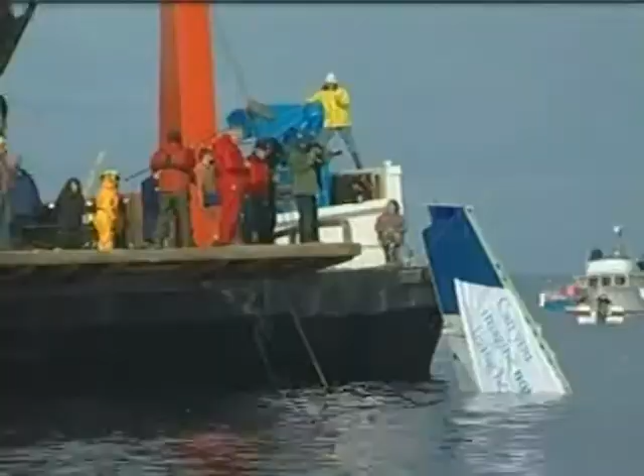We'll show you why this Boeing 737 slipped beneath the waves off BC over the weekend, and why that's a good thing.

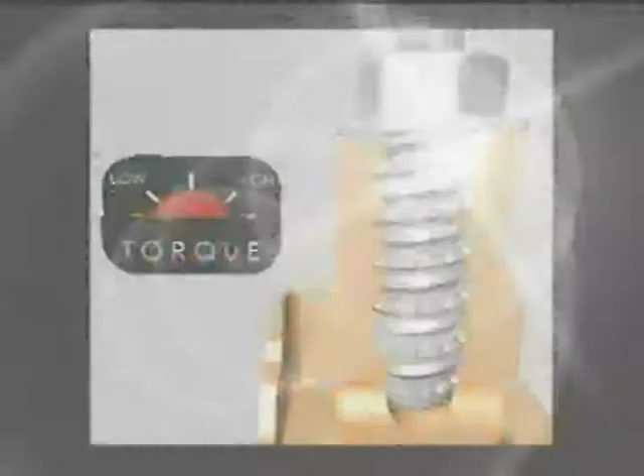Plus, all screwed up and proud of it. We'll introduce you to a guy who invents new kinds of screws to keep this world a little bit more secure.

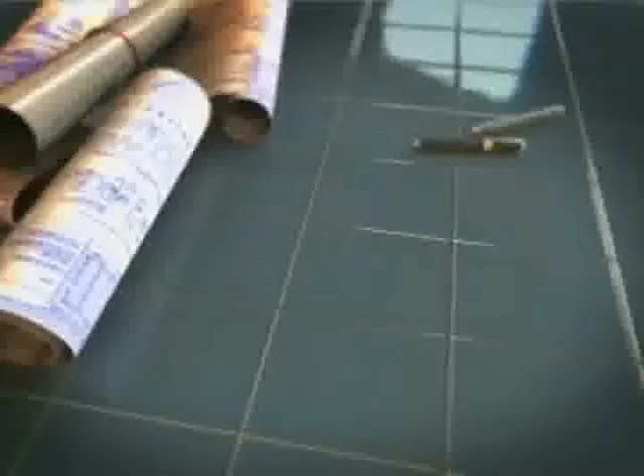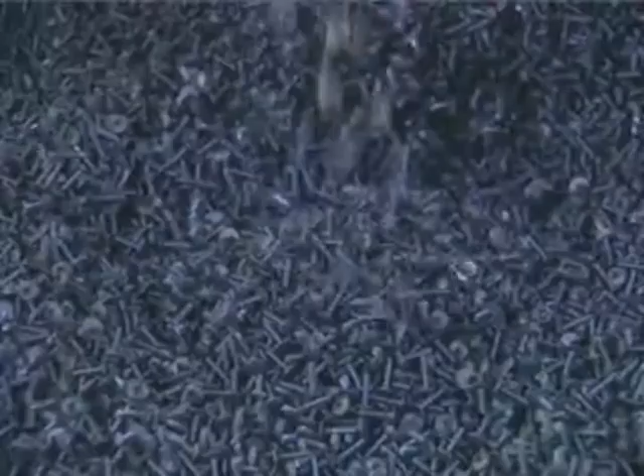Meet Kenneth LeVay, or as his friends call him, the Screw King. The screw is the best invention in the world because within 10 feet of anybody, you have tens or hundreds of screws.

From our homes to our cars to desks, the humble screw does hold a lot of our world together.

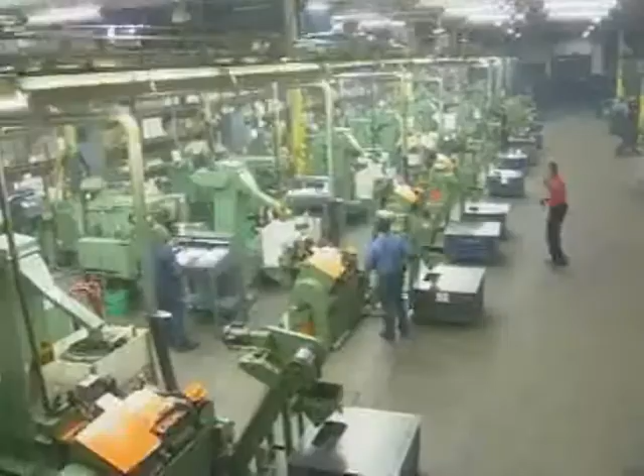Illinois Tool Works, ITW, is one of the world's largest manufacturers of screws. They pump out more than 6 billion every year. If we assume an average length of 1 inch and laid them end to end, they would go around the equator of the Earth 4 times.

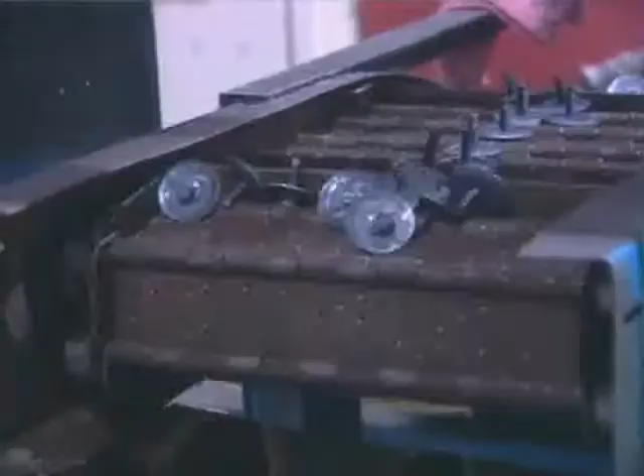Remarkably, screw design has changed little since Archimedes invented it more than 2,000 years ago. As an engineer with ITW, Ken knew there had to be a better way.

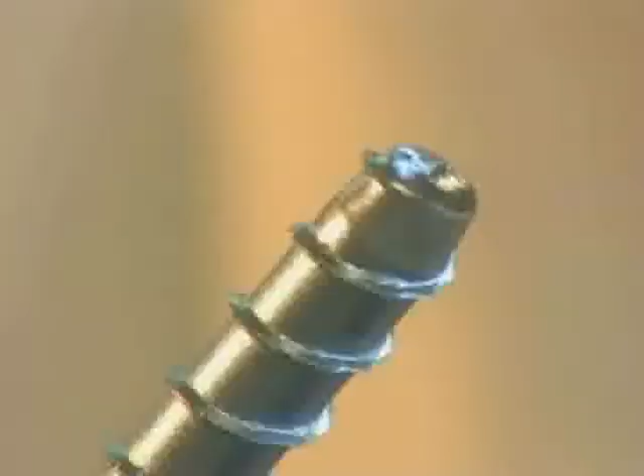The limitations to a fastener have historically been that you have to have this helix, or ramp, that wraps around the screw. Ken thought by changing the thread pattern on a screw, it could better hold and drill into different materials. With 18 patents and another 20 pending, he really is an outside-the-box thinker.

I think I've always been an inventor since I've been a little kid playing with Lego.

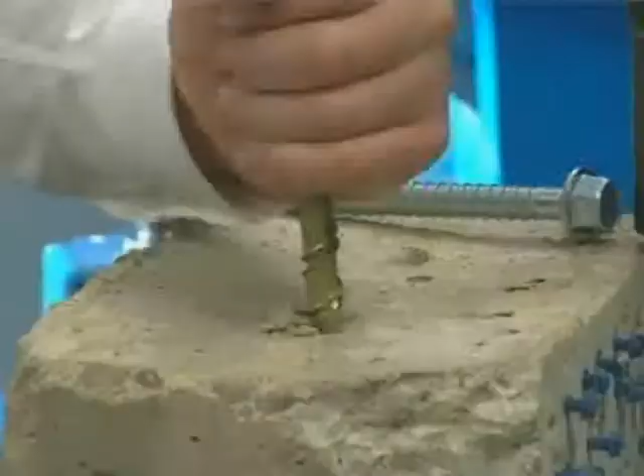Ken first wanted to tackle the difficulty of drilling a screw into concrete. If you take a chisel and you could possibly put that onto a screw—that was the thought. They thought Ken was out of his mind, that you couldn't really do things like that.

Everybody feels like it might be a dumb idea until you prove it, so it takes a lot of effort to prove your idea to people, and you have to have a lot of self-confidence in what your idea is. Because if you don't believe in yourself, then nobody else will also.

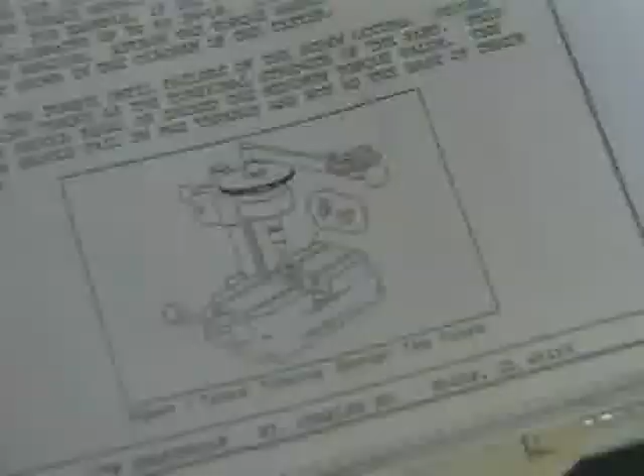By taking the 50-year-old screw geometry and matching it with the latest computer technology, Ken was able to see his ideas in 3D. He calls it Wercs.

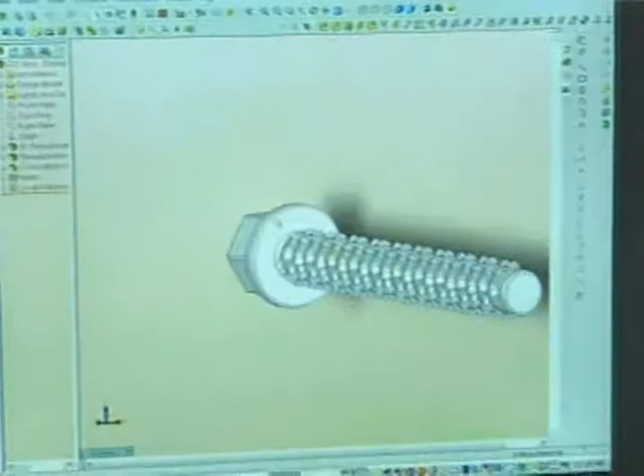That's screw spelled backwards. That's a chisel feature right there on the chisel, and if you put that into a round shape, there's your chisel feature right here. We create it with this math. Your chisel feature is right here.

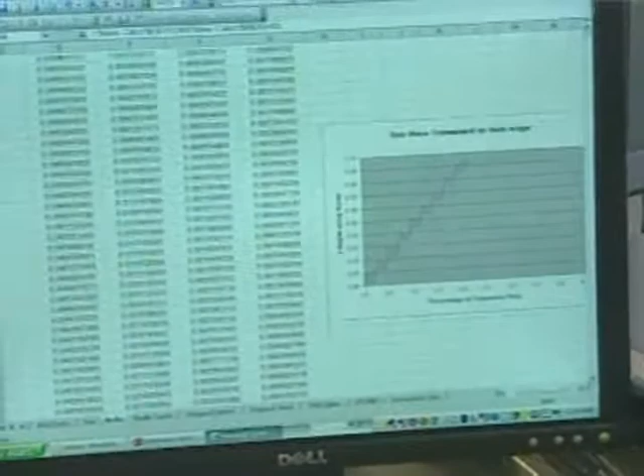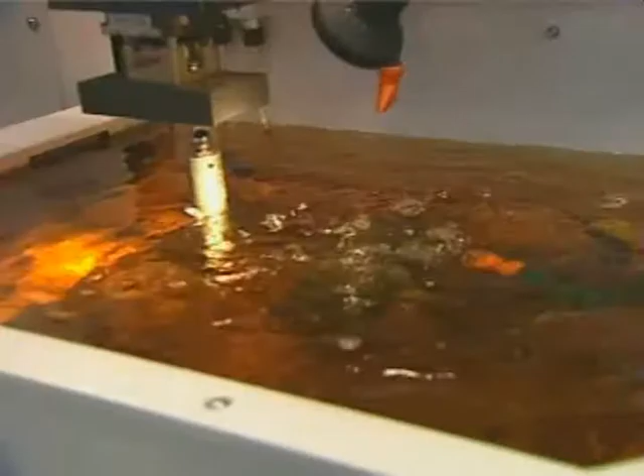Putting math to metal required electric discharge machining, EDM. It submerges a metal block into oil and zaps a pattern onto the surface with a 20,000-degree electric arc. The smoke you're seeing is actually vaporized metal. We then have all of the geometry necessary in this steel tool to make a screw.

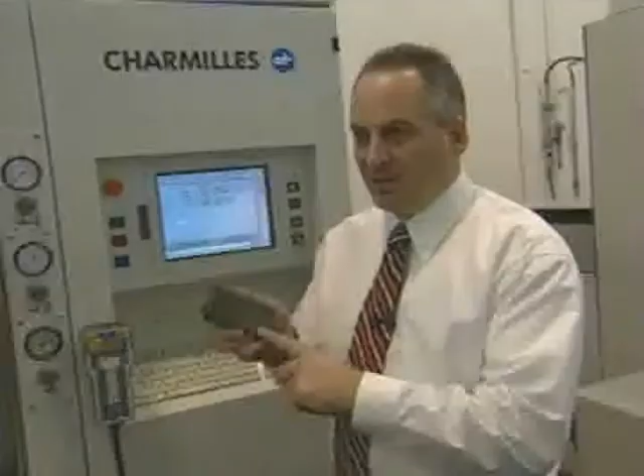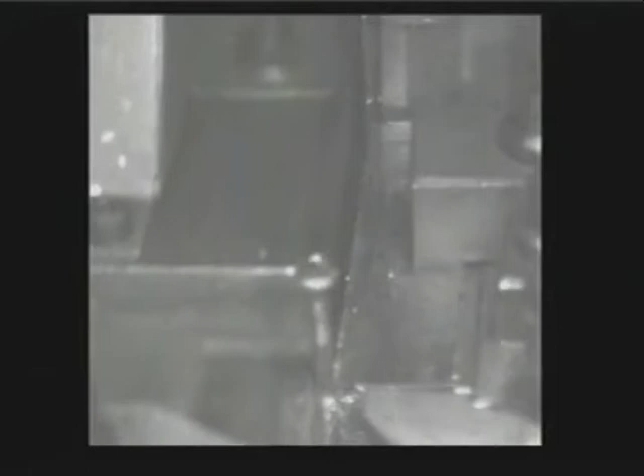The way we make a screw is by taking a round rod with no shape and placing it at the start in between these two pieces of steel. With a lot of pressure, you push them across, and the screw rolls over the surface, creating a screw.

And it worked. In fact, tests have shown that this new screw, dubbed the Tapcon, is 40% easier to drill than traditional screws—a pleasure to drive in, compared to... well, what would you rather do all day long?

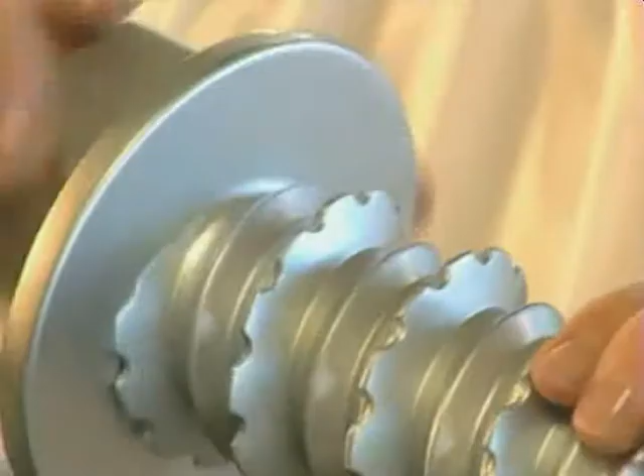Once he'd mastered concrete, Ken then set his eyes on another troublesome material for screws: plastic. When you tighten up a screw into plastic, you put literally hundreds of pounds of pressure on these little teeny threads. The plastic, over time, wants to move.

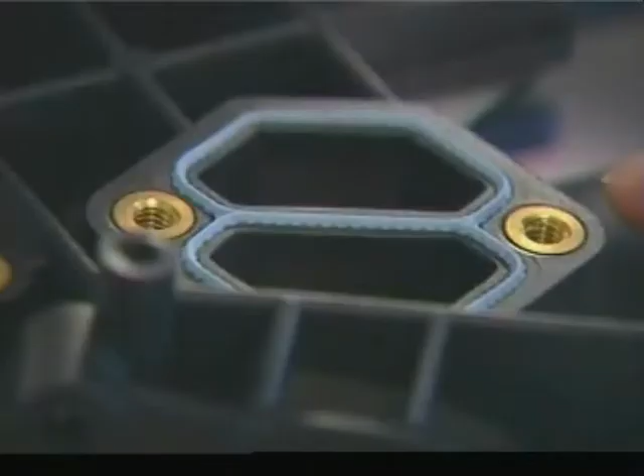As a result, many auto parts, like this car manifold, require brass fittings to hold the screw in place and protect it from heat and vibration.

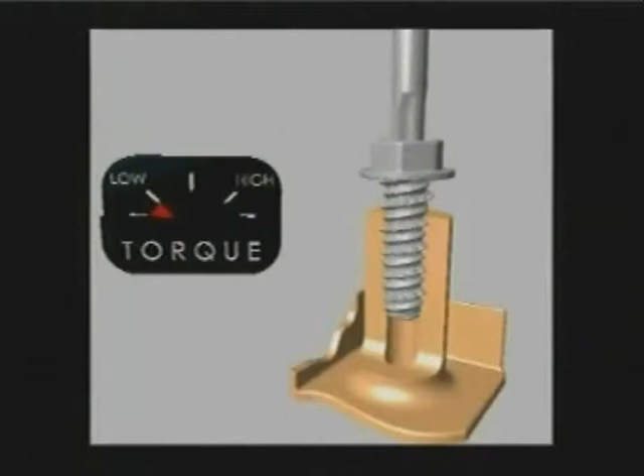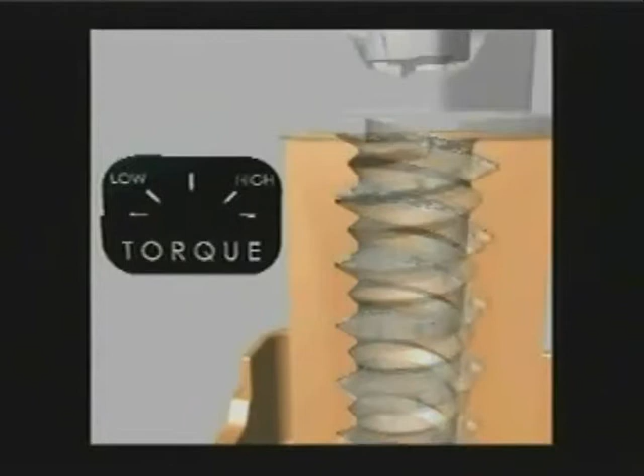Ken went back and tweaked the threads. We took a regular thread, and if we put a very highly engineered little divot in it, the plastic then moves into these features, creating this screw to be physically locked into the plastic.

He called his invention the Boss screw. In order to prove to industry that the design works, he travels the world with a laptop and a briefcase. Inside the briefcase is a custom-built machine, the CRT.

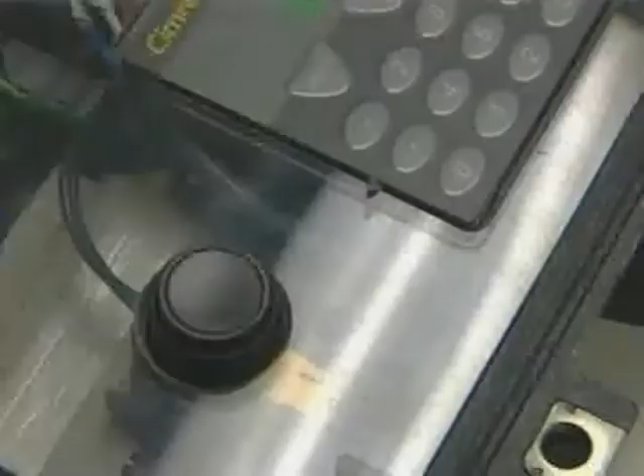The CRT machine stands for cyclical retention test, and the purpose of it is to vibrate regular screws and the Boss screw in plastic in front of the customer to show them the difference.

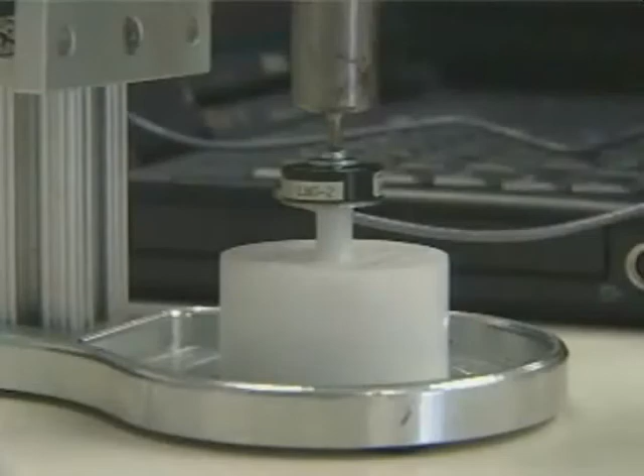And we'll test this screw. The pressure goes away immediately. In a matter of 6 pulses, you've lost all tension, the screw is now loose. What we're able to do with a Boss screw is create the plastic and the screw to interact together to eliminate this from happening.

This test is 500 cycles of vibration. Now I'm going to double it.

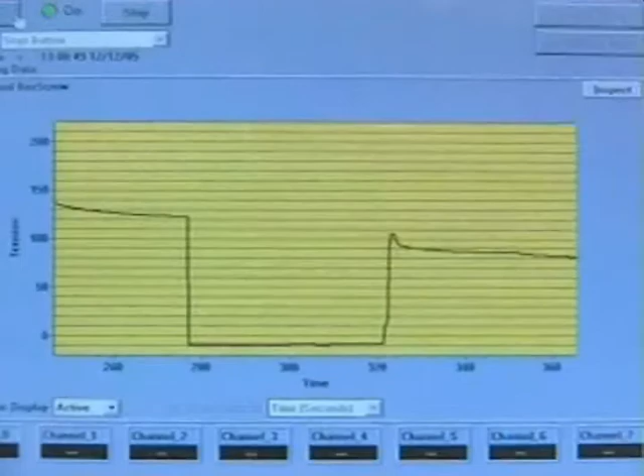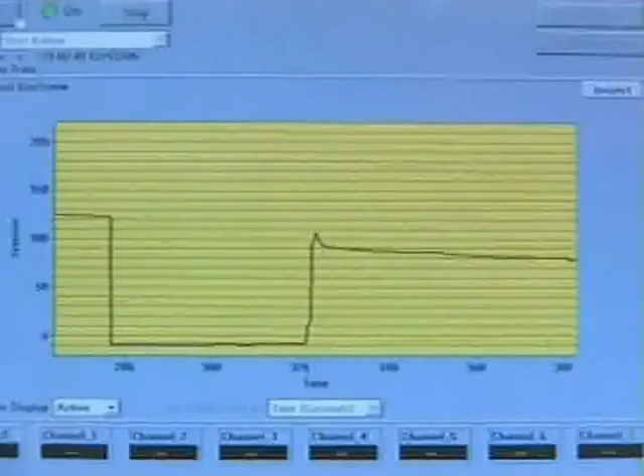Still skeptical? Well, the big automakers aren't. General Motors, for instance, has already ordered millions. For General Motors to release all of their interior screws in the Boss screw product is a total belief.

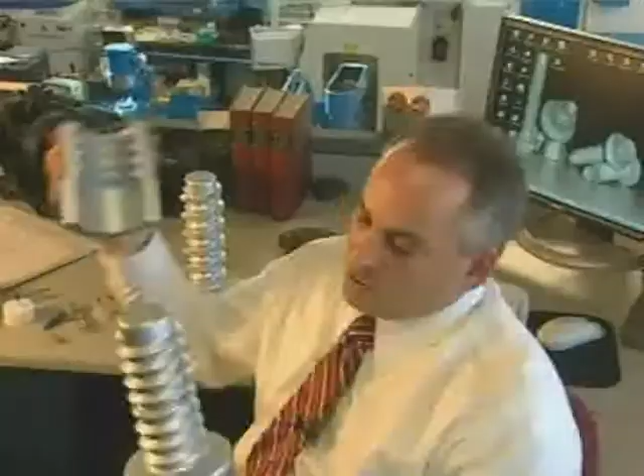But Ken wasn't done yet. Metal fasteners have their own set of problems. Normally in a machine screw, you need to have clearance in the thread. That clearance allows you to drive the screw in. That clearance is also damaging because it can rattle and loosen.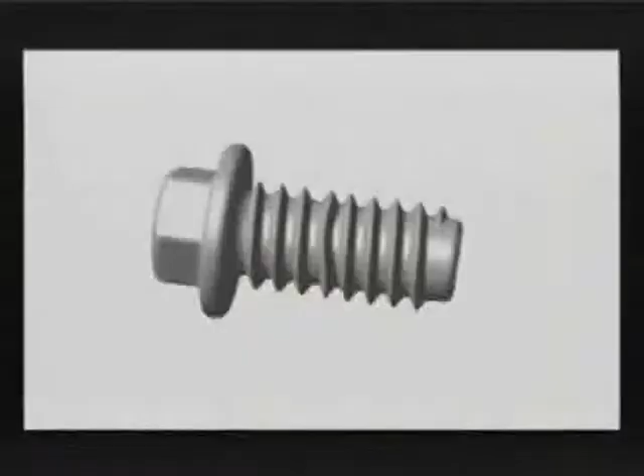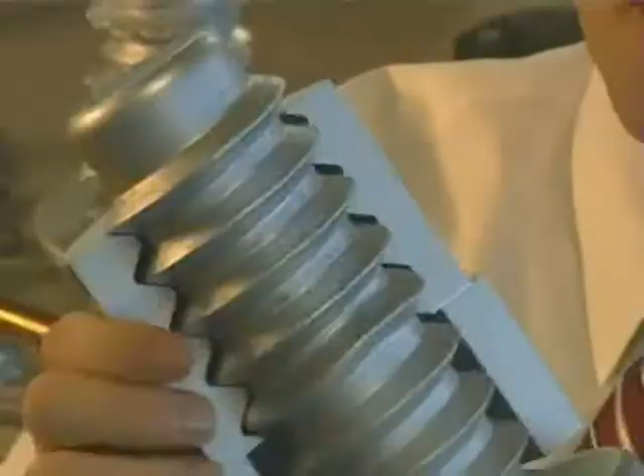By putting a small deformation in the thread, a whole new screw is born. As I engage the sine wave into the thread of the Sinulock portion of it, I get rid of that rattle. We lock the thread into the nut without tension under the head.

The Sinulock also avoids the need for glue, like these microscopic beads that break and adhere when screwed in. This might work once or twice, but the 5th or 6th time you have nothing left.

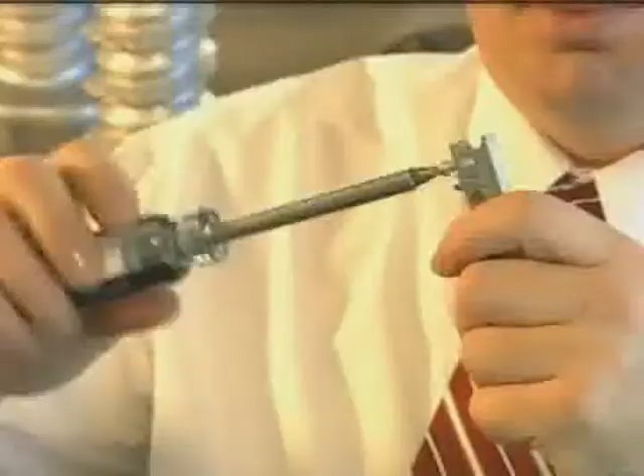The Sinulock works forever. Ken hopes to tackle softer metals like magnesium and aluminum next, but admits he's already exceeded his own expectations. There's expertise on fastening joints, and the thought that I could change that world—that 100-year-old, or 1,000-year-old, world of screws—is just fascinating by itself.

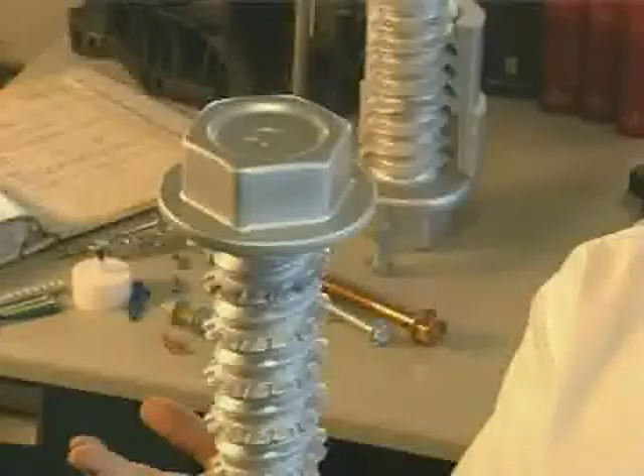Holding our world together a little tighter, the Screw King rules.